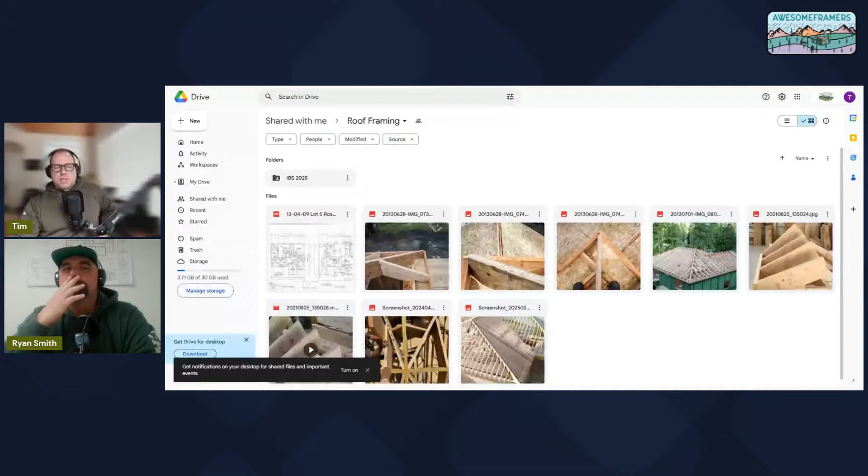But I guess my question for you, if we were to present this to somebody that has never done it, maybe a framer, but they haven't done a lot of hand cut, maybe they've just done trusses—where would you train somebody that came to work for you, that had some years as a framer, but mostly was on a truss roof?

Oh, I think we would go to the basics, and we would probably start with the plan, the blueprint, the roof plan, and the elevations, just to see how many pitches are involved, what fascias line up, what overhangs are the same projection, things like that, and then move into some of the stuff you've shared with using the calculator and how to actually determine the length, the hypotenuse of the triangle that essentially is the rafter, using the terms we use—run and rise, diagonal, things like that.

Okay, so I'm going to share. We dug up, let's see, window. This is the PDF program. Add to stage. So I'm just going to back this up real quick. We built this house back in 2013.

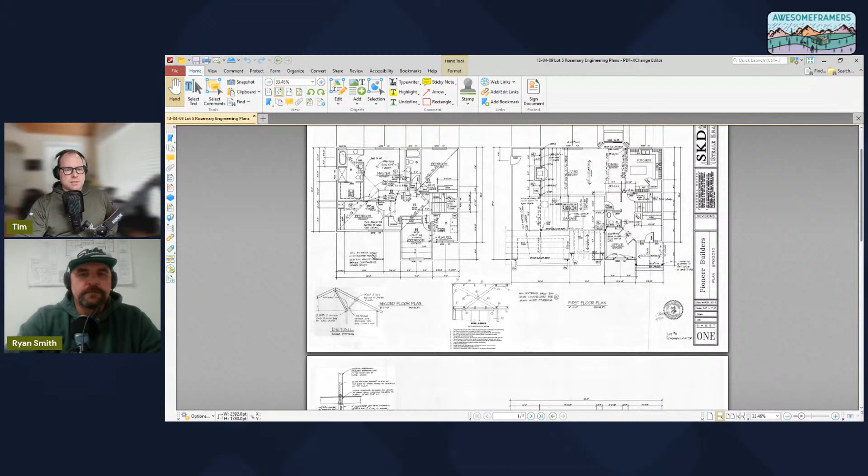And if I zoom out, it's extremely basic. For some reason, every time we get these scans or these plans scanned, they end up being just massive. Okay, so super straightforward—it's all a 612 roof, like the little front was a 412 over the front of the garage, just really basic.

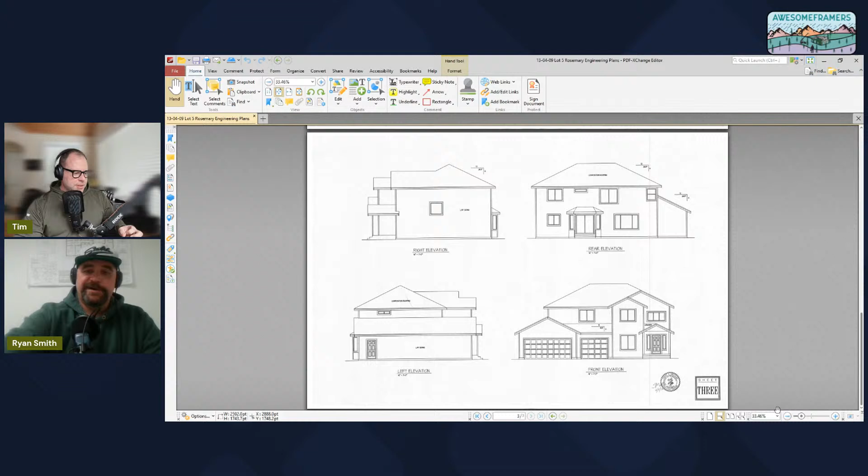And I think this is the last time I framed a hip roof. We did a little one that had a hip over the garage back in 2019, but this one here was the full hip roof. So when I wrote the article for JLC, this was the one that's in all the pictures. Yeah, that's very similar to the one we just did yesterday, minus the gables—we didn't have any gables.

No gables? No. So if I back up—Brian found the plans for me, and there's almost no detail. Yeah, so this is also like the one we just did. Okay, so that's good. So there's the roof basically on the left. Wow, that's wild, look at that. Just really nothing to it.

At least they called out your hips and valleys. The one I just did, they didn't give me any information. Yeah, no. Well, this one's got the engineer stamp, so Terry—yeah, so did ours.

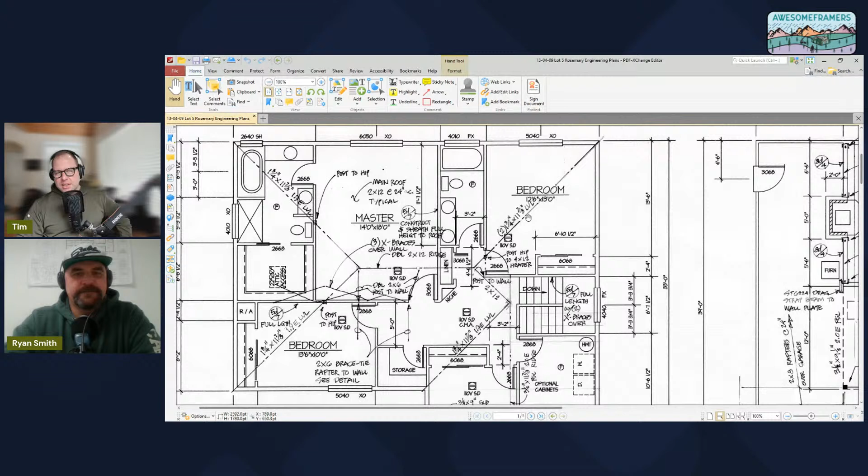Did he? Oh yeah. So one thing Terry always tried to do—if I zoom in, you notice that over this bedroom, there's nowhere to post. Right, but he's got a double hip there. So he's got a double. Yep, he called out 1 11 7/8. But of course, with 2x12 rafters, I had to order 14-inch deep to get full for the plumb cut.

Right, Joe says that's a nice little one. Yes it is, Joe. In fact, I remember when Kyle and I sheathed that—it was a custom, the guy's name was Ivan, really nice guy. We started early the day that we sheathed it, and it was just like ungodly hot, going to be upper 90s. For us, that's pretty hot. Yeah, that's hot here. So we started early, like 6:30, and Ivan shows up with a big carafe of hot coffee from Starbucks, and we're like, hey, thanks, man.

The sentiment's good, but we're just going to get on it and get this thing sheeted so we can go home. And then later, a couple weeks later, he's like, yeah, I don't know what I was thinking. Hot coffee on a hot day.

So if you had this set and you were going to teach somebody, we'd assume the audience might not ask a lot of questions. But we talked about how you can solve everything if you break it down to triangles.

So looking at this, what triangles would you point out to somebody looking at this for the first time? Well, I would start with the ridges first, and those are going to show us the triangles. So we have that one main ridge there.

Speaking on the left side of this plan, we notice where the two hip rafters emanate from. So that dimension out there of 29 feet becomes our main span. Then we would have to pay attention to what our ridge board is and if that's called out. In this case, it is. Looks like you have a double 2x12, so we know that's 3 inches.

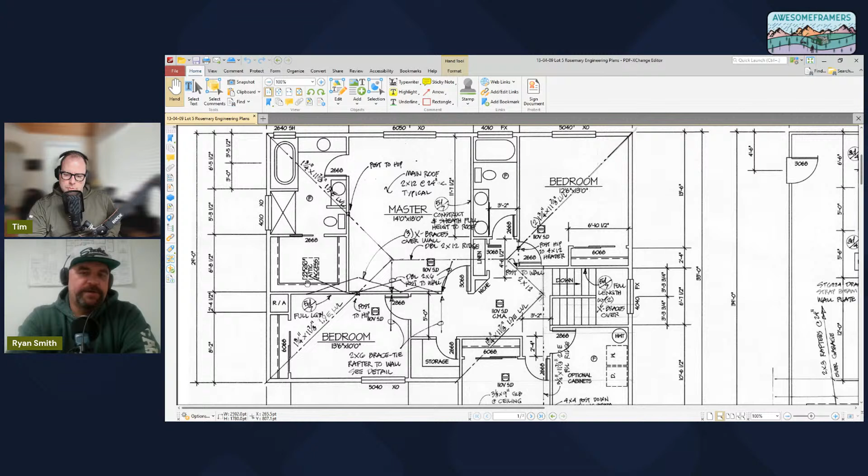So we would just start there very simply without thinking about the hips, jack rafters, or anything. I would want to show them how to solve for the common rafter and then how to determine the height, or the top of that ridge, from the top of our wall.

That's something I like to do. It's a nice home base. It keeps you grounded while you're working across more complicated roof structures. If you can always know where you're at in relation to the top of your wall, it helps as you get into more detailed things like broken hips and jacks and irregular hips and valleys.

So if I'm making a note, you would start with the ridge for the main span, and I would start with determining those commons, the major pitch. In our case, they're both the same because it's all a regular roof, which makes things a lot easier.

Everything's a 45 on this roof, so let me see if I can draw some lines. I'm not very good with this PDF-XChange Editor. I feel like, okay, I think I can draw a line. Let me draw a circle. You're looking for basically the 29 foot first.

Then you want to solve for common rafters and the ridge height, correct. So let's define, just in case people don't know, what is a common rafter?

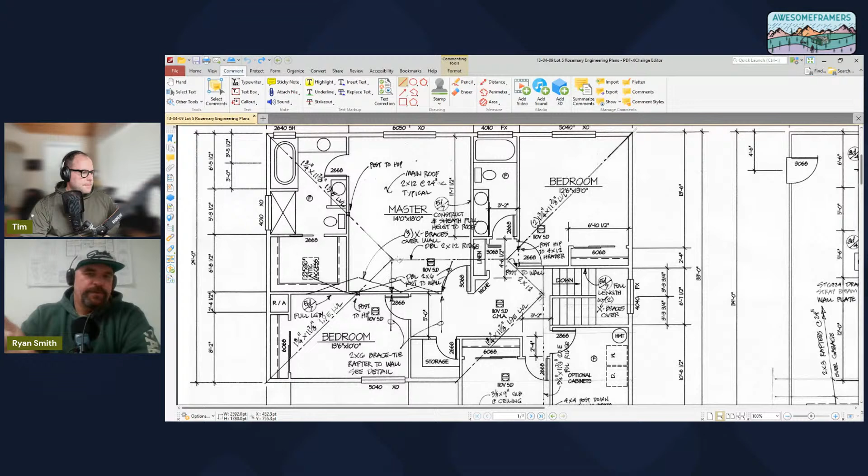Common rafter is the rafter that sets the ridge. In the regular roof framing world, the end king common and the common rafter are the same. If you are dealing with irregular pitches, then there's a major pitch and a minor pitch. The major pitch always sets the ridge. It's not necessarily the steeper pitch or the shallower pitch, because it can go either way.

But finding that highest point, as we're figuring as roof framers and carpenters, we're figuring the roof, but we're building it in our head. So in order to set the hips or figure the hips and jack rafters, we have to establish the height of that ridge, the length of that ridge, and the length of our rafters that are going to get that ridge actually set. So I kind of work it that way, as if I were building it.

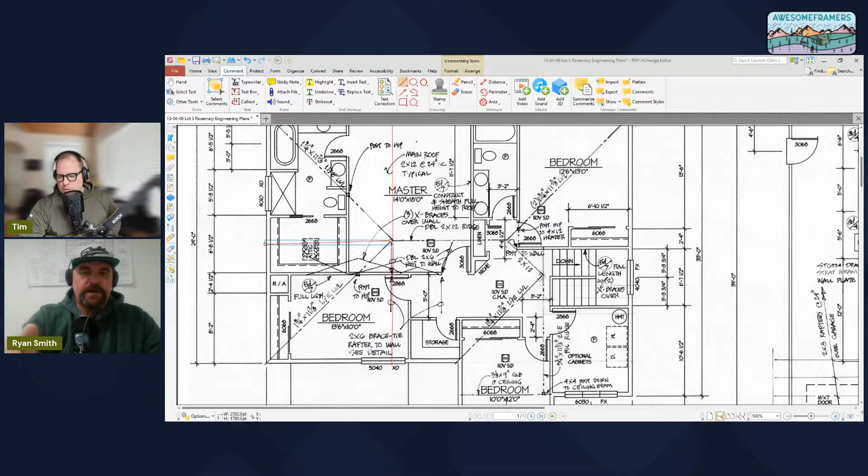Then once I figured out the common rafter, I would look at the length of the ridge and how to determine that. I would note my layout off of what I call a boss corner. That helps me find layout anywhere on the roof, north, south, east, west, doesn't matter, which would give me the layout on the ridge. Then I would start looking at my hips, my valleys. Once I get those calculated, then I would start looking at my jacks.

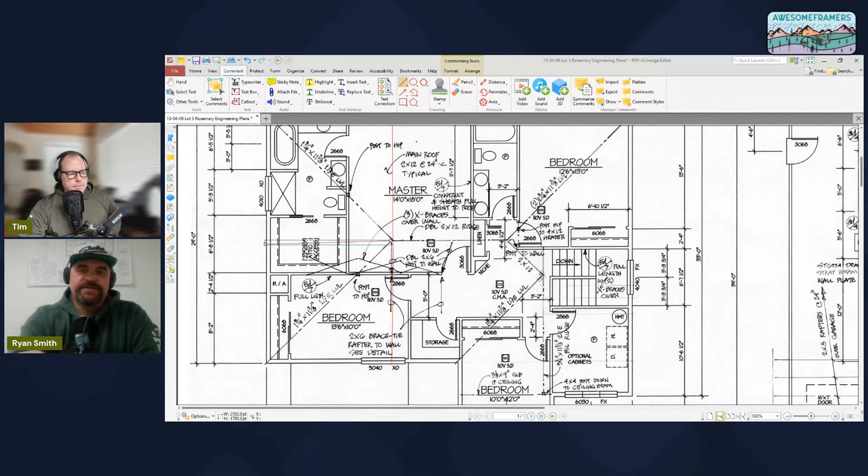In a case like this, with this layout, this one's pretty straightforward. So the rear elevation, or the rear of this roof, we have a double, or a 2-ply LVL hip, on one side and a single on the other. It's still the same length at the center line where we're going to actually make our marks and our cuts. Yes, one is twice the size of the other, but the line length is still identical.

So essentially, once we figure out one hip rafter, it's the same as 3, because we have 3 full hips here, and then we have a broken hip that's coming down, sharing, looks like probably a gable ridge coming back in. Let me share. Okay, present.

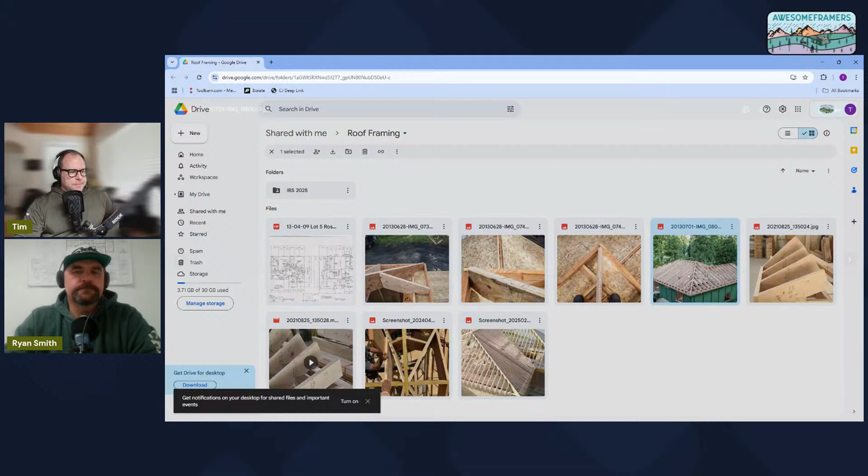So there's the double hip. Basically, I'm going to try to consolidate this, and then I want to make sure we get to some questions if anybody has any.

When we're looking at triangles, step one is to find the ridge and really define the triangle: the horizontal line, the run of the rafter, vertical to the ridge. Let's see if my cursor actually shows up here. I don't think it does. Does it? Oh, that's interesting.

That's a great picture. I like that picture. So that was the old days before the drone. That means I was up on the forks, and Kyle boomed me up.

Yeah, I like how you ran that ridge all the way into your king common. So we could diverge a little bit. You notice that we did the little bay roof down at the bottom first. I don't remember why, I have all the pictures for that. I think I probably thought I was going to write an article out of it. But running the ridge through, to me, just simplifies things. And then I think it looks like I doubled that king for that reason.

Can I zoom in on this? I know I keep trying to do that. I don't think I can. It doesn't let me. Oh, it's the mouse wheel. And then how do I pan? Just like that. Okay, oh yeah, there you go.

So we've got, let me back up. We've got all 2x12 rafters. It looks like we have the double 2x12 ridge, like the engineer called out, but we lowered it for the air gap and full bearing on the heels. This back hip we're looking at is doubled because it clear spans. The other hips we were able to post down off of walls. And then this ridge, because the designer always just kind of leaves that stuff up in the air, they just draw lines, and then we have to figure out how.

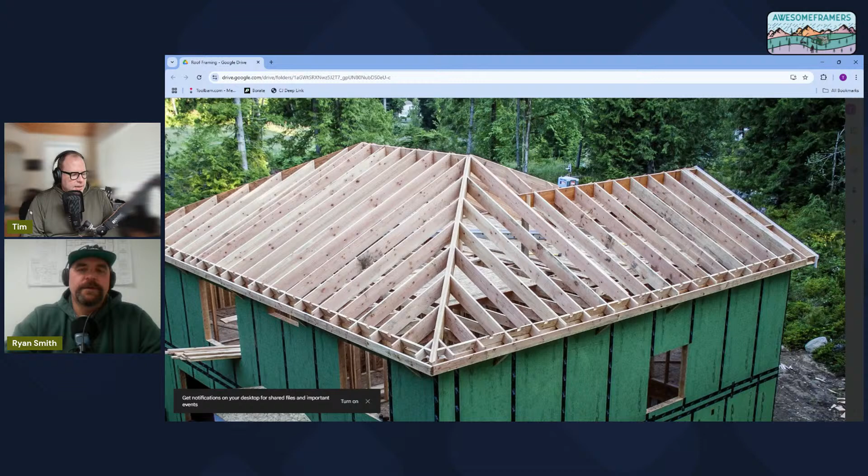Yeah, so if I can, let me see if I'm actually able to do this. In terms of triangles, this is a good run-through for IBS. We may want to actually be able to draw across, because I don't think I can draw on this. I thought I could a minute ago.

So we have the horizontal, like I think of a ceiling joist. We go vertical to the ridge, and then the diagonal is the rafter, the hypotenuse. Right, so there's a right triangle. In this case, the bottom right would be 90 degrees. The top is the 6/12 plumb cut, and on the plates, 6/12 level cut. Then, because it's a regular pitched roof, these hips are in plan view at 45 degrees.

So if you're solving for the hip, the line length of the rafter is easy. We just enter the effective run: span minus ridge divided by 2 for the run.

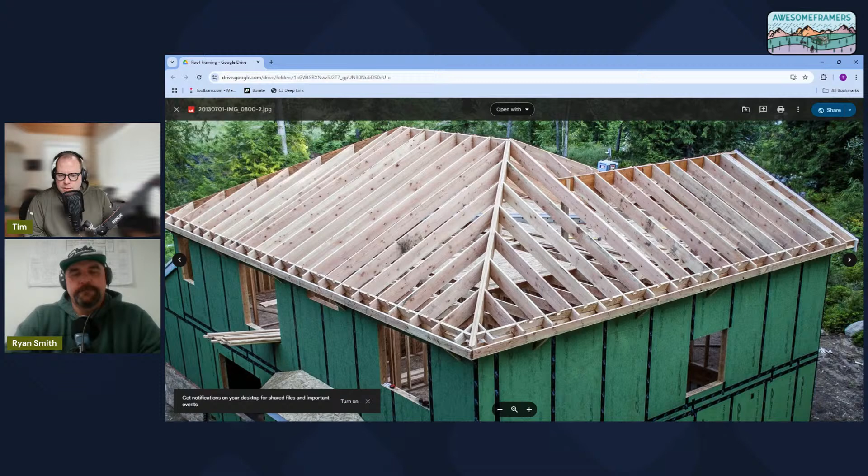I think we show that in a video here in just a minute. But then when you're breaking somebody new into hips, where do you start when it comes to calculating the hip?

So the run of your common rafter, you just plug that into your horizontal run of the triangle and your rise or your vertical plumb line. You're basically taking that triangle and laying it down flat. So if you took the run of your common rafter to the face of your ridge, and then the run of your end common rafter and king common to the end of the ridge, and they're both the same rafters, you can use those as two of your variables, your run and your rise, and then solve the diagonal, which will then tell you the run of your hip.

Okay, let me switch back to that other view. Yeah, the hip isn't the same pitch, right? It's a 17-inch run. So that's where roof framing gets sticky. It depends on how much you do know, like where do you actually start to explain, based on your level of understanding.

Yeah, that's a good view there because you can see. Did you just draw those two lines? The red ones? Yeah, I kind of. Very poorly. There's a run and a rise, and we're solving for that corner.

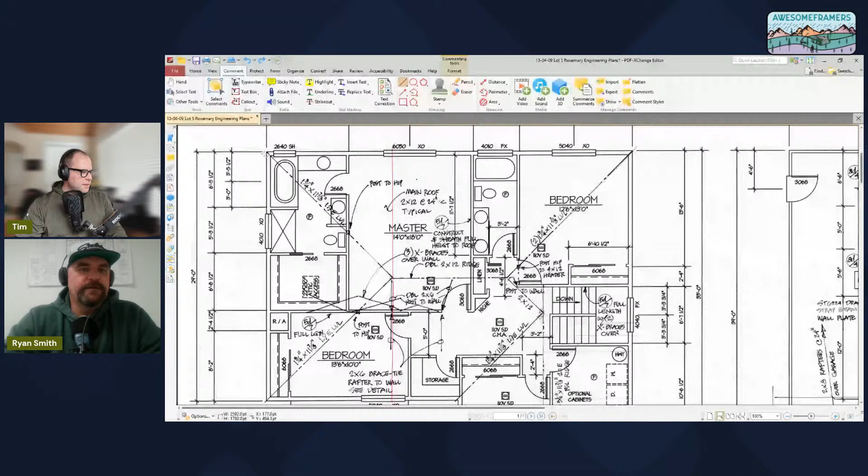I'm trying to make these lines thicker, and I just don't know with this thing. There should be, let me see if I can thicken this up a little bit. I'll try to make it obvious. I appreciate everybody's patience. We've never done this before. We don't know what tools we're using. We have no idea. No idea.

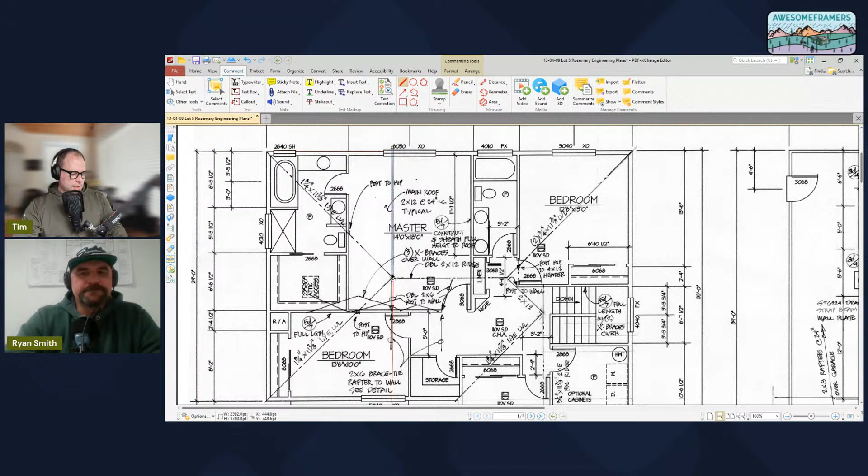Okay, we can crank this way up. There we go. Okay, so we have the run. Let's just say, I'm going to delete that if I can. I'm just going to draw a new line. So we've got the ridge here at the top. I think I keep clicking on that. We're just going to make this kind of ugly, but it's going to work. So there's the horizontal, the run of the common rafter.

And because it's an equal pitched roof, then that distance has to be the same as this distance. Correct. Yes. And logically, then it would be the same as this distance. Yes. So in plan view, now we have a right triangle where, since these are the same length legs in a right triangle, then this has to be a 45-degree angle. Correct, in plan view. Right.

Okay. And then we would need to solve. So using the run, which is the same as you just stated, if you're using the Construction Master calculator, or even if you aren't, and you're just using the trig tables in whatever scientific calculator, one is run, one is rise, or one is A and one is B.

So then when we solve for that, the diagonal becomes the horizontal line under that hip. It has nothing to do with the length, because we're not taking into consideration the slope at this point. We're always starting with the run. That's the first thing we want to know. That's the most important thing, because that sets all these points coming across the roof. Knowing the run of that common rafter, we know the length of this house, corner to corner. We can just take that number, subtract that run twice, and that'll tell us the length of our ridge.

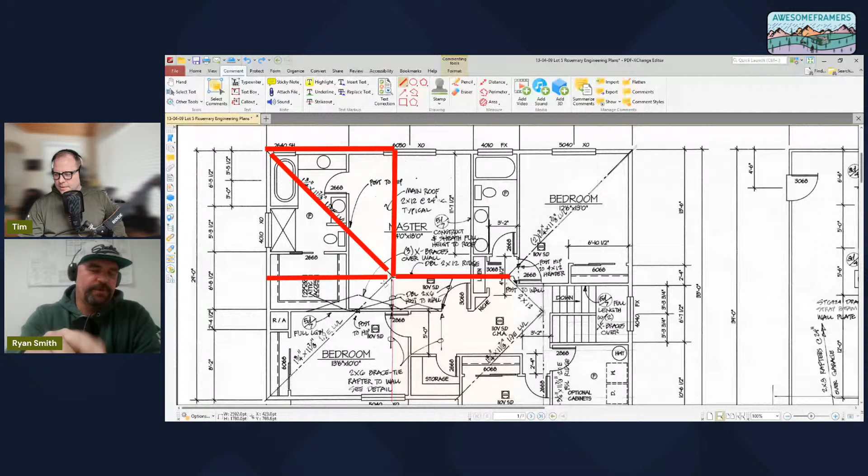I like it though because I'm not completely trusting the technology in here. I know the tables are all correct and everything's perfect, but I like to see the solution come out on both ends - check my shortest jack rafter, figure my longest, work myself down and back up to make sure everything's good before I write it down and go out in the shop and cut it.

So I do want to learn more about that, I just haven't spent the time to. Yeah, I watch their videos on Instagram, it's pretty interesting. Yeah, I haven't.

Let me bring back that other window. There we go.

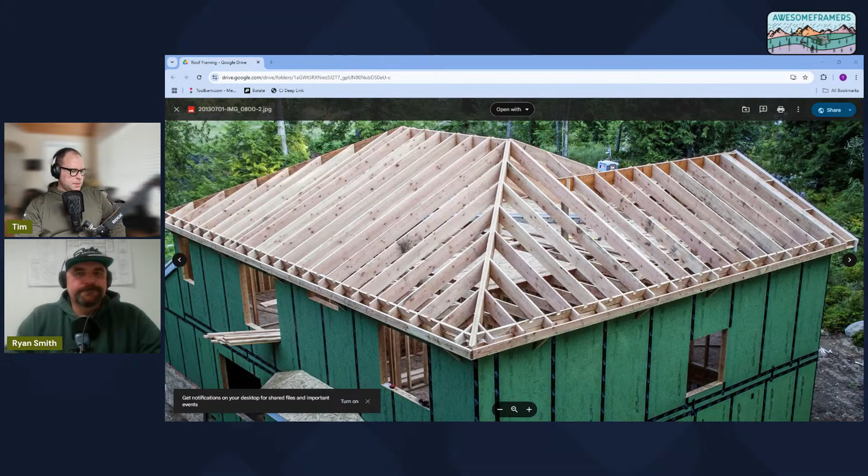Okay, so what we were just - man, I really wish I could draw on that. I wonder if I could open this in something else. Let me try something real quick, because I think this might help.

If I open this file, I might be able to open it directly in PDF-XChange Editor. Maybe not. Well, you know what, I'm going to open Photoshop and do it that way.

One moment. I'm going to share the same picture of the hip roof with the double hip and the double king commons, and then we can draw on it. I should have had this all ready to go. Oh, no worries, it's amazing the skills we have to learn now. Let me just start a new layer. Yeah, it's always changing too, new materials and new techniques.

Okay, Photoshop, here we go. I should have done this to begin with. Add to stage, okay so there we are. Now we can zoom in. Got to click into this.

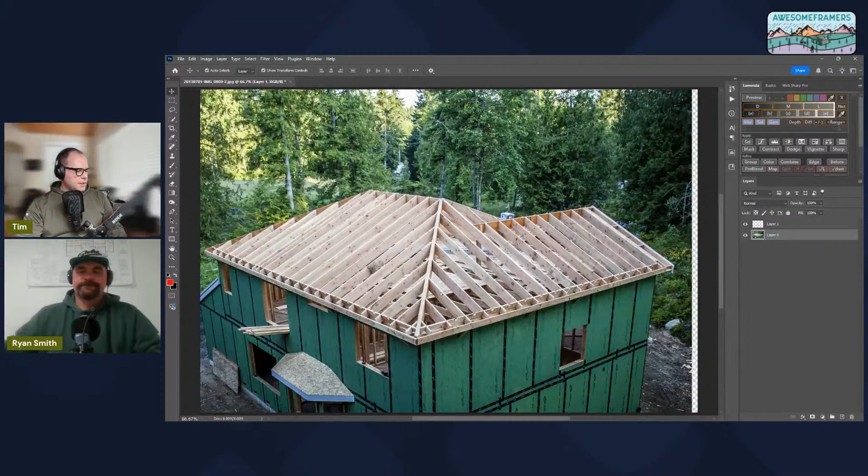Okay, so I'm going to zoom in and let's just draw some of the triangles that we know we have. So what we were just talking about, I'm going to go B for brush. We'll just pick red.

That is a great picture showing a regular hip. I like it. Yeah, I don't know what it is here in the Northwest, seems like we do mostly. Why won't it just give me B? I don't know why all of ours have to be irregular.

It's such a pain. Oh, I see, get rid of that. There we go, there we go. Let me shrink that just a little bit. Okay.

Cool, so I'm going to try to very crudely draw some triangles. This is going to be pretty bad. So we have vertical, and let's just go this way. So there's one triangle, roughly, right? So there's the common, perfect. Yeah, and that would loosely match. I like this. Look at that, perfect.

Dialed, okay so there we go. This is why I don't draw. But it's essentially, if those are right triangles, they're identical, they're exactly the same. Let's just say there's no thickness for anything. Right, so 6-12, they have the same run, the same rise, the same diagonal.

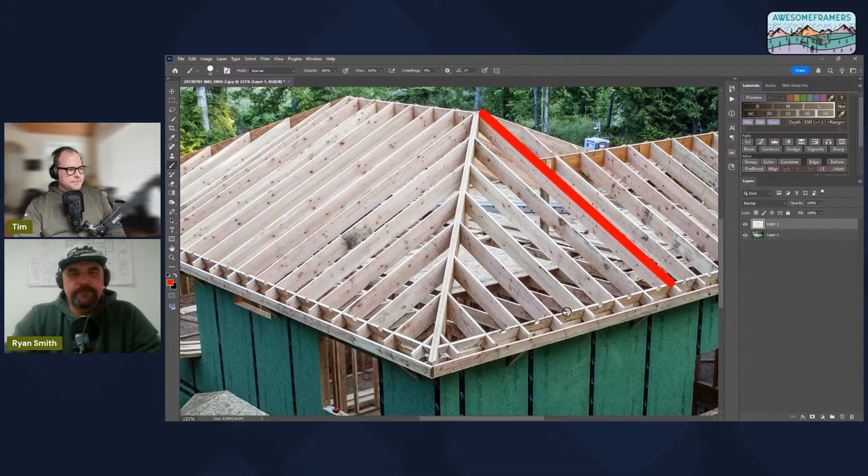So the run, let me try to redraw that real quick so that it's a little bit more normal. So we've got our king common, this guy. And our king common is, make sure I'm on the right one, this guy. Right, so those are going to be the same exact length, and their runs or horizontal distance, which would shoot somewhere back here by that post, those would all be the same.

And because this guy and this guy are the same, they actually follow these as well. Exactly, so the runs are all the same, and we're just sliding those triangles back and forth. And then to get the hip, we would just basically rise, run now on the horizontal. Yep, and there's our 45 underneath the hip. Right, roughly, we can make that a little cleaner.

Yeah, it would be in there somewhere more like that. Then from that, we have all of our vertical numbers, and so now we have a whole bunch of triangles that are mostly the same. And the last one that we would solve for would be the hip, which comes all the way out to here. So we're kind of just making a pyramid. Yeah, more or less, roof. That's all roofs are, they're just triangles.

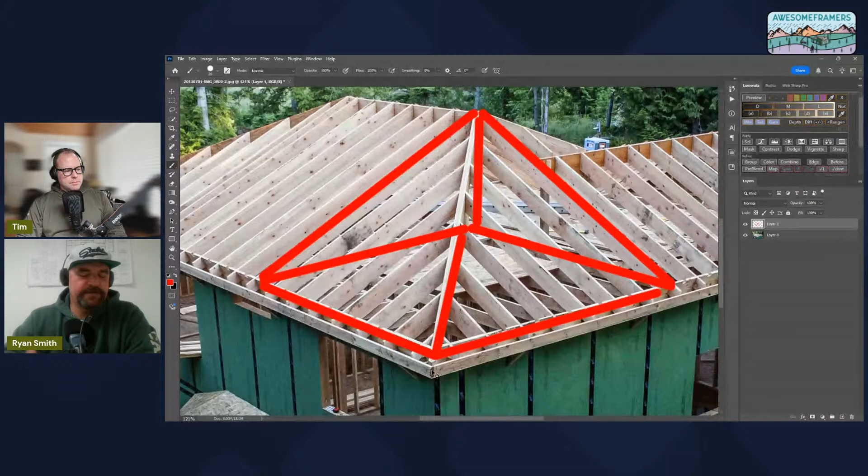And I'm simple, so I take it one ridge at a time. Some of the plans and roofs I've cut, when you first open the plans it's very overwhelming. You're like, wow, there's 47 hips and valleys and 22 ridges. So if you just take one at a time and look at it the way we're looking at this photo you took, it gets a lot easier. You just take little bites at it.

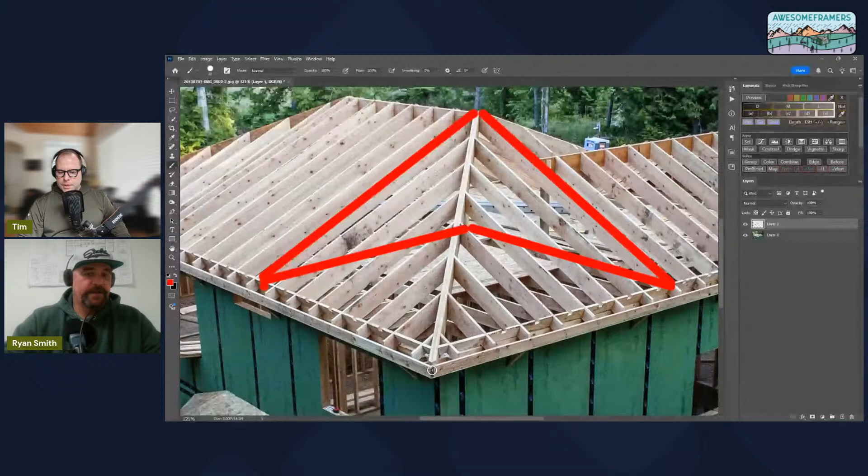Yeah, a little bit at a time, which leads me to like the overhangs, which is why I like to start there. Because if you take care of all that business that happens out there outside the plate line with your cornice work, and you know that's set and everything is good with all the pitches, you have your plating figured out, your height above plates, then you can really just focus on the triangles because you've already worked that out. And I like to do that graphically.

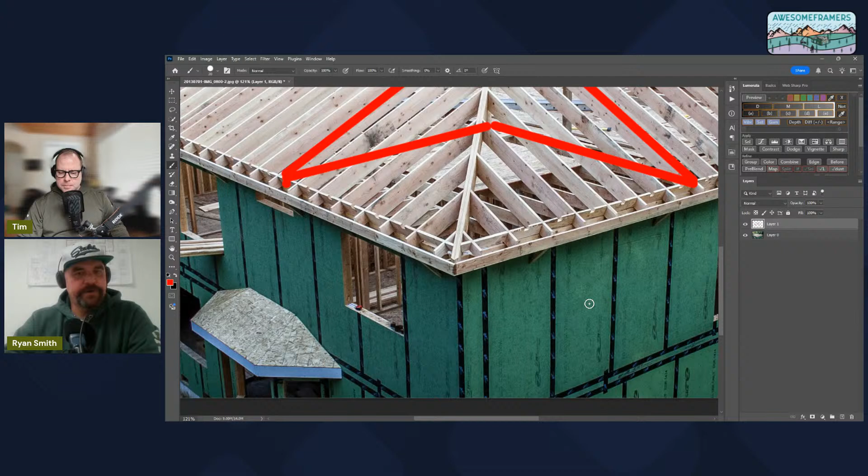I'll actually draw it out. You've shared that too, Tim—I've seen you do that on your page, and a lot of guys on Instagram do it. You can draw it out, figure out your overhangs, make everything line up nice, and then forget all about it and just work from the plate lines in, like we're showing here. It works good for me.

Well, yeah, that's the thing—it's like the more teachers there are, the better.

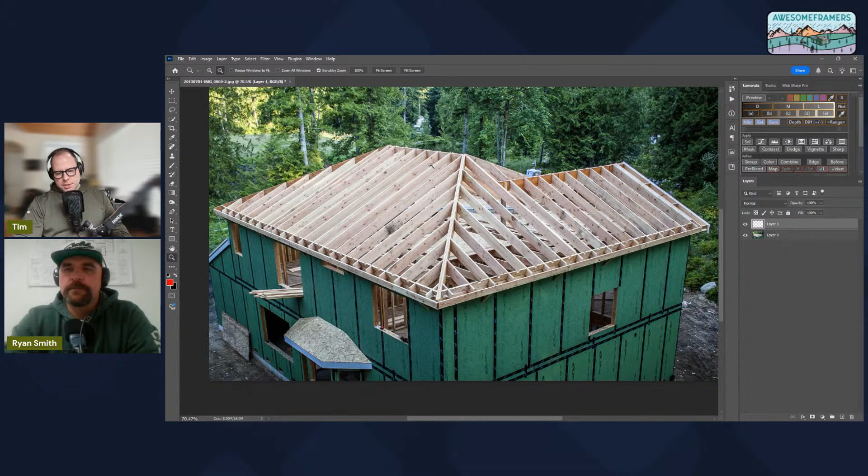I'll briefly explain how I went about framing the roof. I did exactly like you said—let me get rid of these lines. I've always set my ridges, that's just the way I was taught. With a double ridge, it's usually too heavy for us to hold in the air, so for this upper ridge we calculated the height and set it on posts, then set these rafters to it.

So step one was to set the ridge. Step two was to set about four sets of rafters just to lock in the ends, and do the same thing on the other side. But we ran this wild.

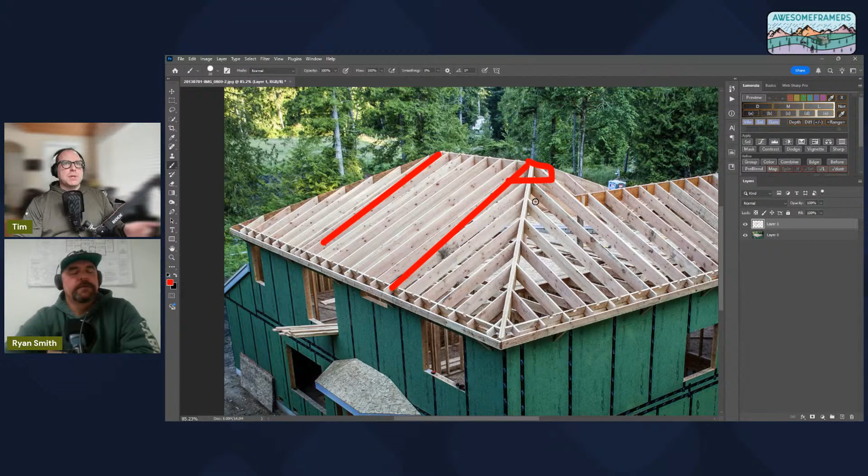The end of your ridge—actually, let me back that up, because I think Kyle and I took pictures of that. Let me back up: this rafter went in and located this end, but we ran the other end wild.

We put the two rafters at the next layout mark back, then held the other king common right where we wanted it and just marked it to the plumb cut, and cut it off in the air. Yeah, I used to do the same thing.

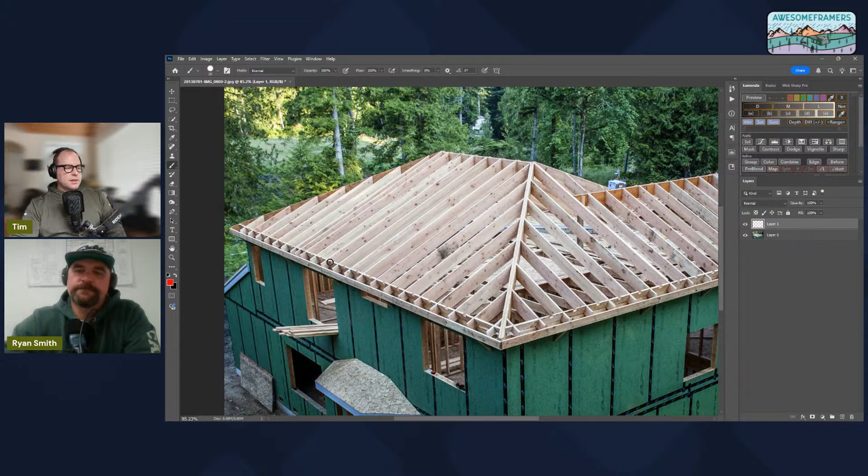That's just it—and like Joe mentioned a bit earlier, for this ridge we just take one of these rafters, slam it up against the double king, and mark it because you're so close.

Yeah, it is contagious, Joe. That's funny.

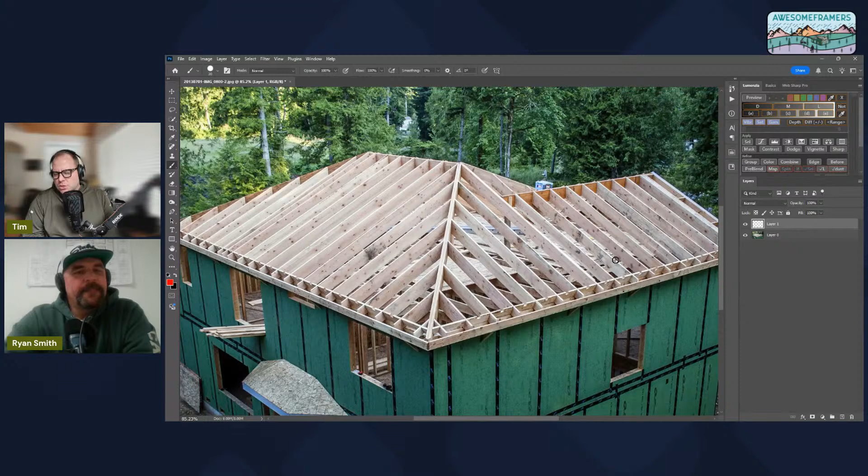So I'm thinking as we go through this, Ryan, I'm trying to simplify this for IBS, and I'm going to make some notes—greetings, Green Bay, Wisconsin. I think we need to get really basic and describe, maybe using this picture, and I'll try to label it.

In this picture, this is the ridge. This is a common rafter, and this is a common rafter—let me clear those so it's not cluttered. This is a hip rafter, and that is a hip rafter. I'd love to get people more involved.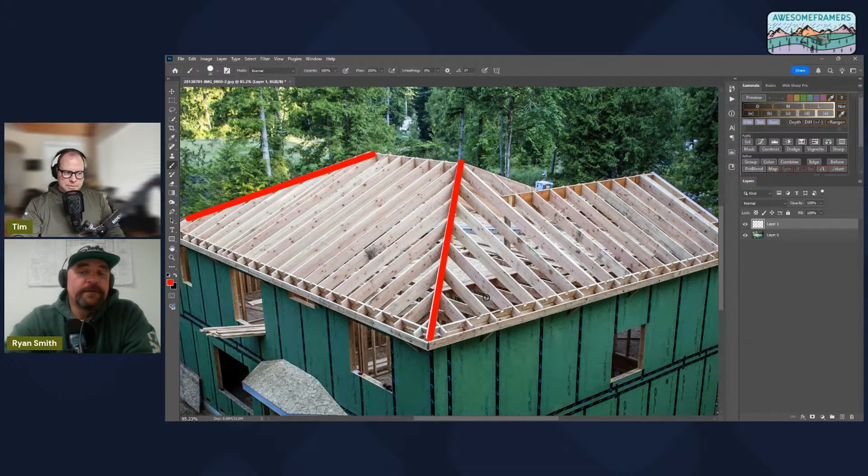There's one more hip rafter in the picture—where is it? Right, yeah, we only have a half an hour. That's the issue, and we're already past that. We could talk about this for the entire weekend and barely scratch the surface.

So I'm thinking I do like this—calling out the parts of the roof and explaining what each one is. I don't know if we'll have enough time to really explain how to actually do it, that's going to be too time consuming. You could spend a half an hour just on a common rafter, really.

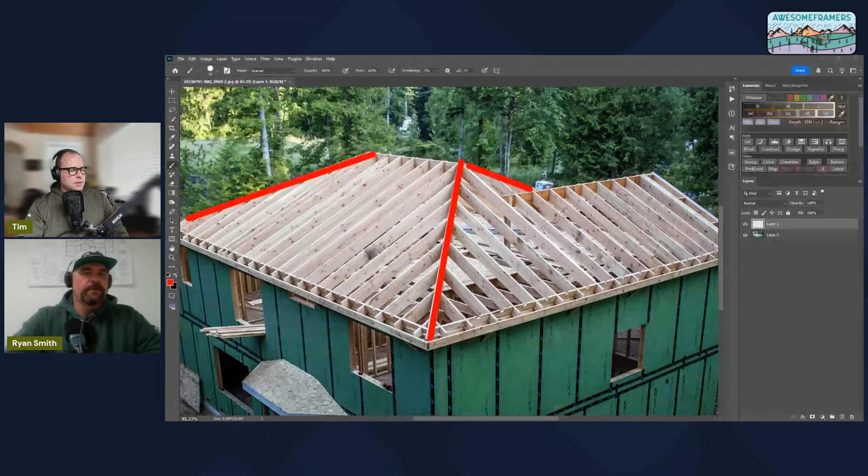So maybe let me see if I can do this quickly, because Photoshop seems like a good way to do this. Let me put this over and we'll add another picture. I'll zoom out so there's just a close up of the other side.

Now here's something I do that's not necessarily right, but I don't think it's wrong either: I didn't calculate anything from the plates. I calculated it from the outside of the wall sheathing, so I could butt my rafters right into the soffit framing, because the soffits were all pre-framed.

Yeah, and that sometimes trips people up. But one of the things I think is important for people to know—I do the same thing—is that the overhang is a separate calculation.

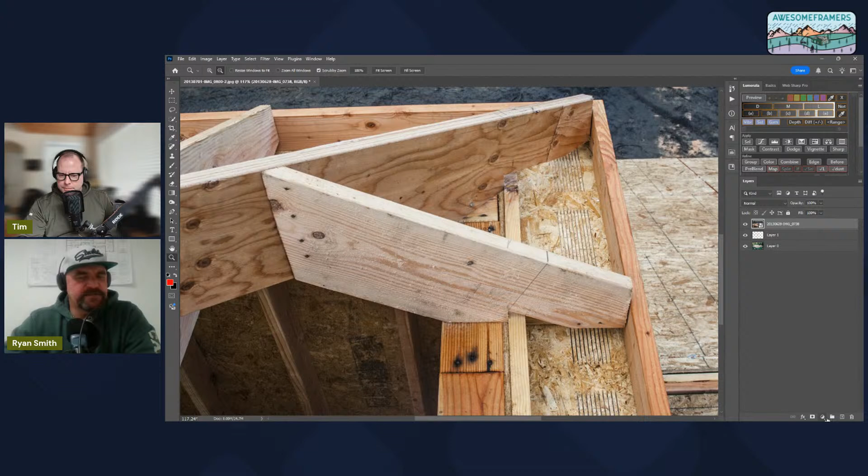Is that what you're referring to? Well, specifically—let me create a new layer here—right down here: basically I would have used 29 feet 1 inch to start my calculations, because I'm adding a half inch of sheathing to the outside of each side.

Oh yeah, you're right, okay. So I was assuming 29 feet was the face of the wall sheathing. Oh, okay—yeah, however the plan called it out.

Typically our numbers include what they'll call a 6-inch wall, so they're saying a 2x6 with 7/16 or 1/2 inch sheathing on it. When I took AutoCAD back in high school, around 94, 95, that was the big debate in class, and of course none of us knew, we were just students. Your walls are 3.5, 5.5, but with sheathing, which was just coming in with double wall construction, it was like, do we add that? Of course, you do whatever you want. For us, because we pre-framed the soffits, we had that 2x4 nailed to the plates. Now we could just butt our jacks, nail them at the ridge, and slide them over. Yeah, that's awesome, it's like having an extra guy down there.

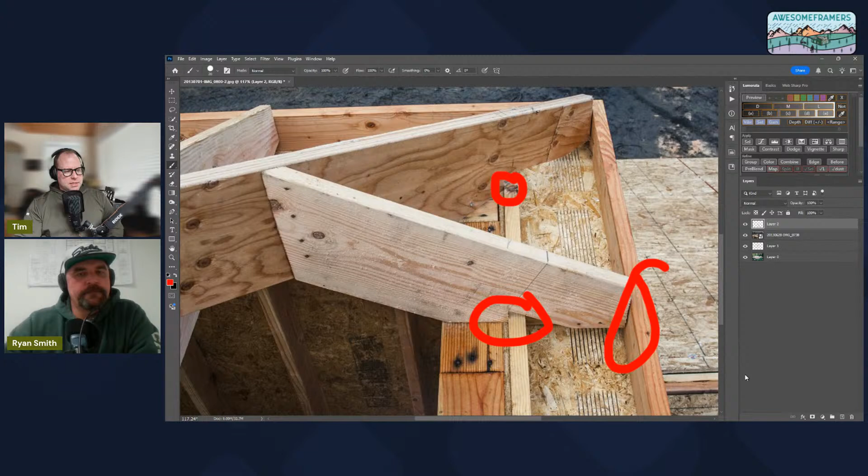I don't think we're going to get into this in the class, but essentially what I circled here, that line of sheathing, then when we cut our hip, it has to hit exactly that spot too. People always like to nitpick us on that, because I always cut everything a quarter short for the soffits. I want to make sure it fits. That's my biggest secret I don't tell anyone, because they ask how we're cutting these roofs and everything just fits. Well, we cut all the ceiling joists a quarter inch short so we can move, because we frame on top of the ceiling.

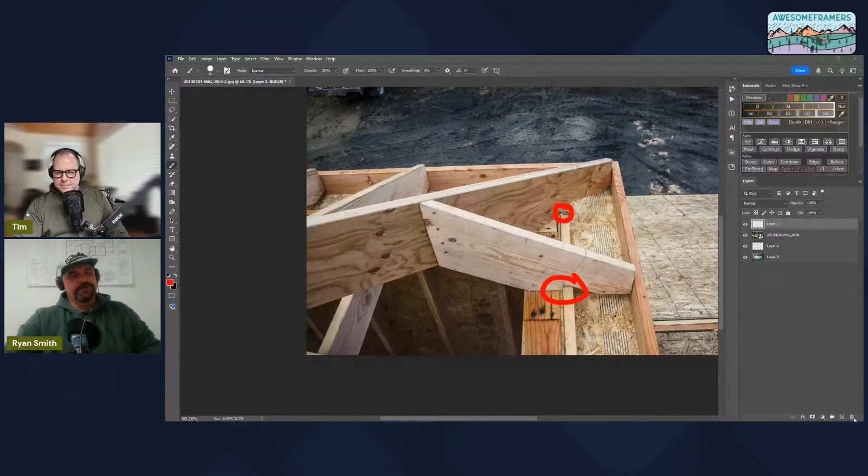They call it an energy heel here. So we add the 1.5 inch rim board, whatever the ceiling is, and that gives us a 1/2 inch of play to move everything around and get it perfect again when we go roll the ceiling joist. Everyone's like, oh, everything grows, if you cut it 16 feet it's not 16 feet. Okay, whatever, but we control everything as carpenters. If you do everything with a purpose, then you can get good results.

That's right, that's a great picture. I love that.

So those are those original Keens that were just clown shoes. Yeah, this was like the first iteration, and it was like, hey, they're comfortable, but by putting the safety toe on the outside, as opposed to most manufacturers who shave the last of the boot back. So you can kind of see how we framed it. Got a double ridge down low too, it looks like. Yeah, that was just over a section of the garage. Yeah, that was a fun house.

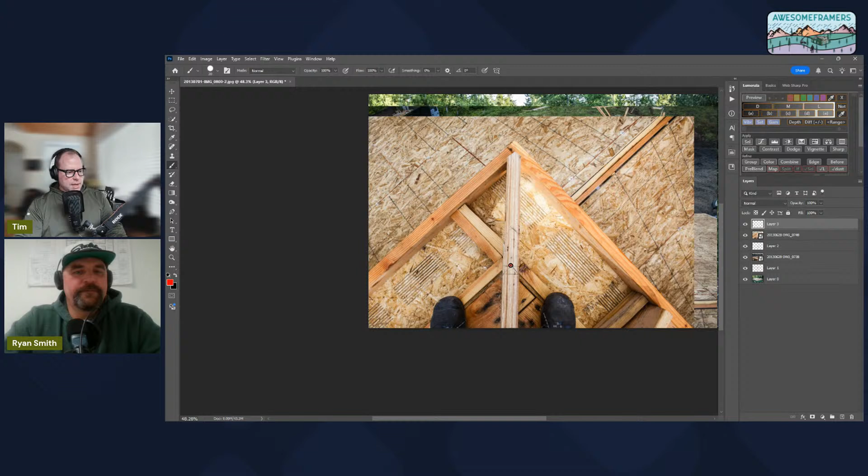That's a perfect picture to explain plan view. That's exactly what I was thinking for the presentation, plan view. So horizontally, like here it represents the outside of the wall plates. So our number actually is right to there, and then got to measure half the thickness of the ridge back. But the same exact thing we're talking about for the kings is the same as this, there's just another triangle.

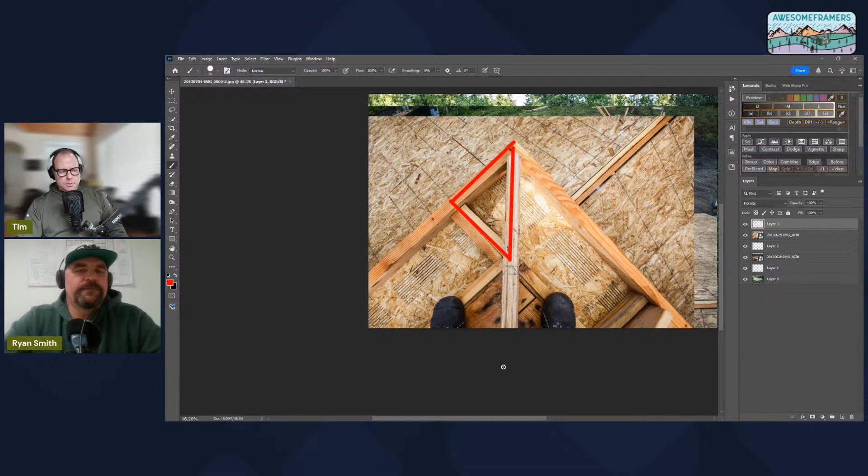And then if we rotated it on the side like we had it, we can add a vertical number to that, get another triangle, and that gives us our wall sheathing, or our roof sheathing. So then to figure out roof sheathing, we can just come that number and connect the dots, and of course this would be a right triangle. Right triangle math will get you through 99% of any roof framing scenario that I've found.

Okay, let me erase those. So it's really just starting with the triangles that you can solve for first, or the ones you choose to first, and then working from there. And then there would be roughly the horizontal, and I'll just go like this. There's another triangle for the hip. Try to make that 90.

Piece of plywood and a couple piano hinges. Yeah, because that's essentially all a plan view drawing is, right? There's no dimension to it.

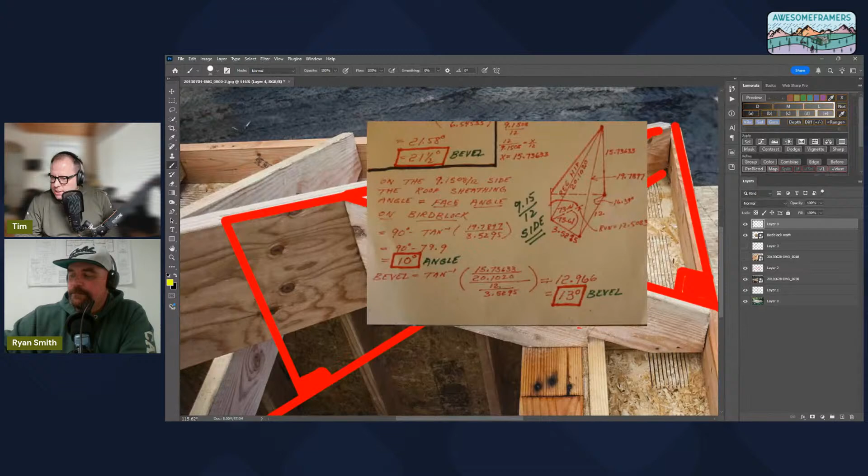Okay, I don't think that's a question, he's just going through the math. San Juan Island, nice, Friday Harbor. Used to be a guy up there that posted a lot on JLC about 20 years ago. I don't think either of us can... Hey Paul Garrick, I don't know that either of us can recommend a good architect or engineer because we don't know where he's from. Right, yeah.

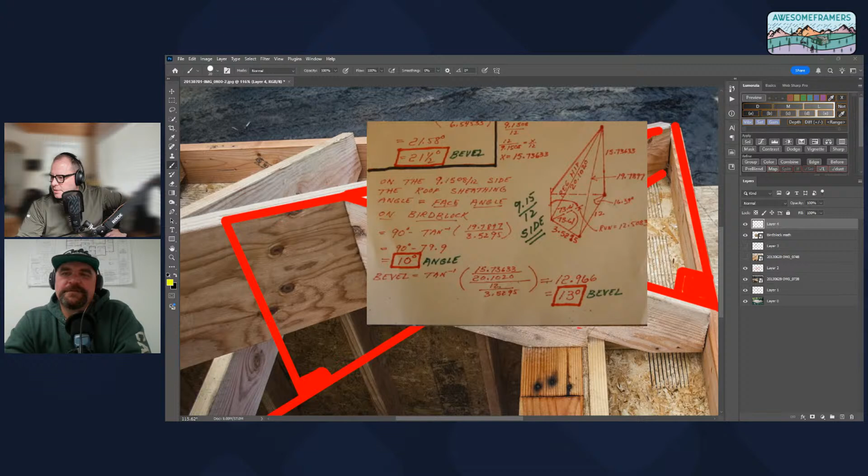Okay, here's a good question Kyle's got. Can I pin this? Is the height above... hey, look at that, always the same for the hip. Yeah, that is a good question. That's a very good question. Answer it, Ryan, answer it, you have 5 seconds.

Yes and no. Depends on if you're backing your shoulders off your hip. Otherwise, there's a deduction. But it is very close to the same height above plate. How's that for an answer?

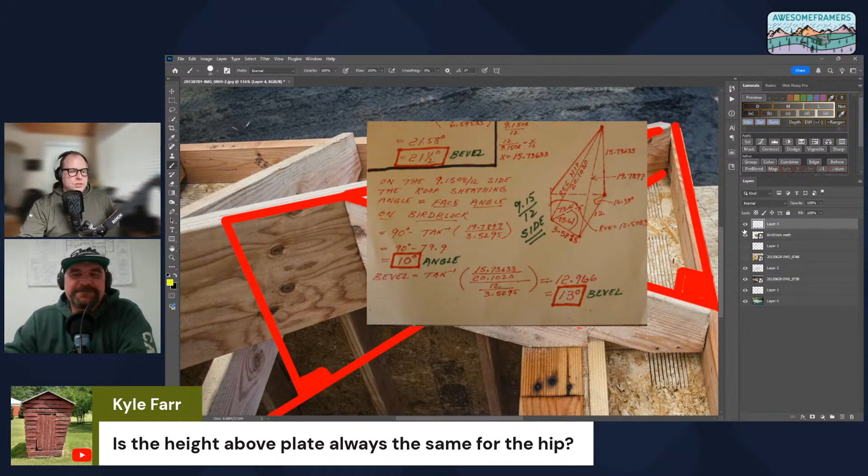It's true. So if that's true, let me turn off these layers. Height above plate depends on where you're going to put your bird. Are you going to cut your bird's mouth square and pull it in tight to the outside corner? Are you going to bevel your bird's mouth? Are you going to mark half the thickness, like you said earlier? Because at that point, that top view you had looking down shows that.

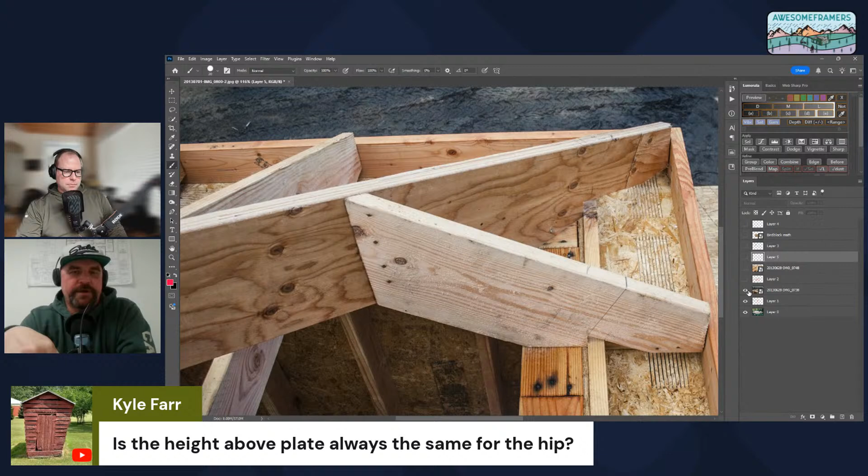That was a perfect view. When we were looking straight down at the hip, you had the actual corner of the building drawn. And at that point, where was it? Yeah, right there. So the height above the plate is exactly the same where you have those two lines, perpendicular lines coming back. Yeah, you can see it.

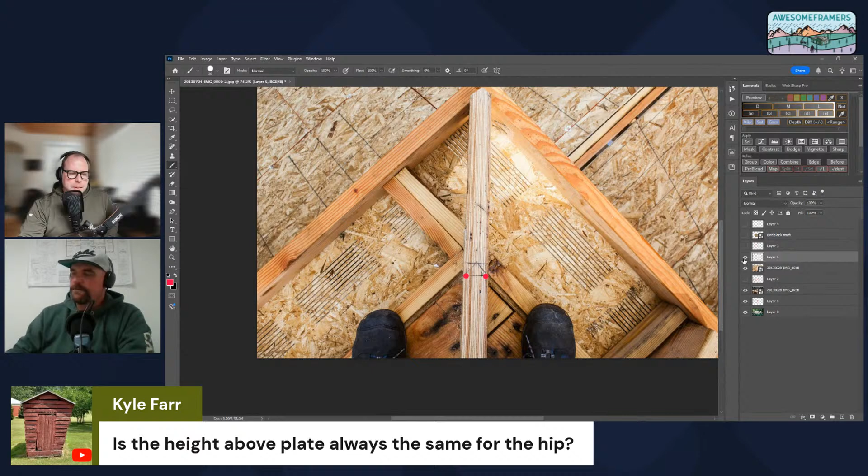That's a great shot. You would have to lay out your height above plate there, and right here. Yeah, exactly. Which roughly lines up with that. So that would be my answer, going back to - got too many drawings - is the birds, or the height above plate. Let me turn this. I just created a new layer just for this.

Okay, so height above plate, for those that don't know, is the vertical distance really at the outside of the wall. In this case, for me, it was wall sheathing, but most of the time you can actually see the mark right there on the top of that rafter.

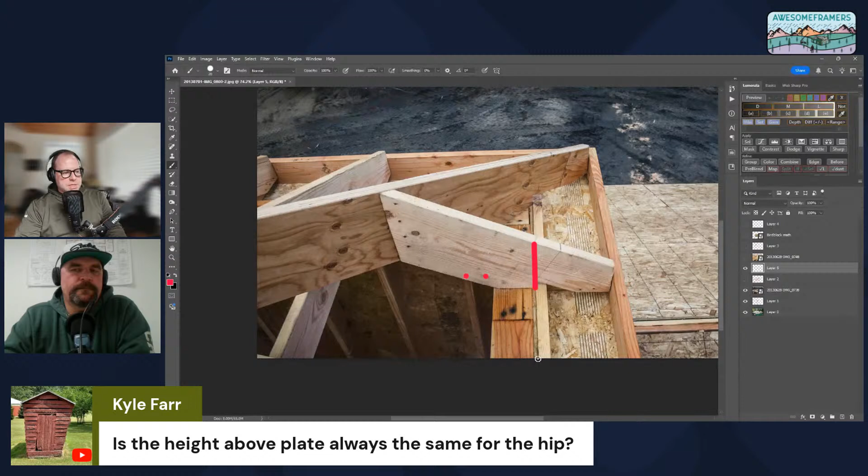So then the question is, I would say yes, it is always the same on the hip. Only with regular roofs, though. Yeah, because irregulars, with equal overhangs, it won't sit on the corner. So there's a whole other conversation there.

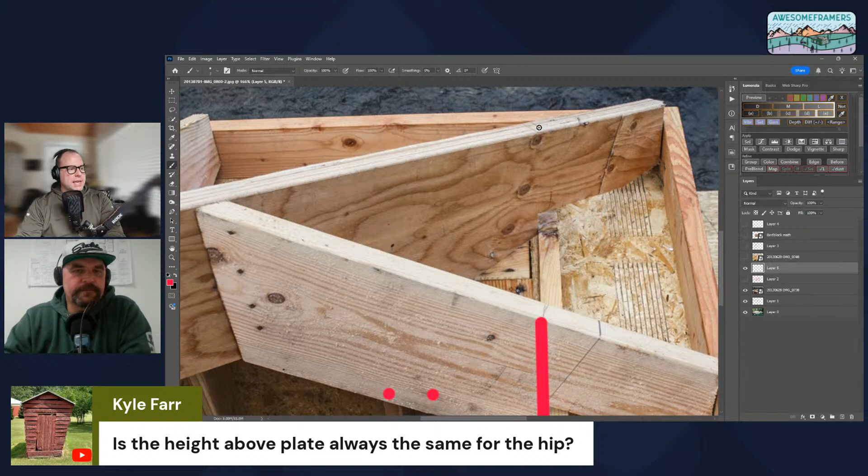So that's why you can kind of see if I zoom in. That's a good illustration. Boy, I wish it was higher resolution. I probably have these files somewhere, but you can see. So the hip rafter length is the outside corner. It's over here, right? And then I always draw my plumb line straight down, which would be probably somewhere. It looks like I have a mark there, there, and then we go parallel back half the thickness of the hip, and that gets us right there.

Yep. And then I just square cut. I don't use saws with bevels to go both ways. Yeah, I don't either. Stop it. Yeah. And then that connects the dot to right there and right there.

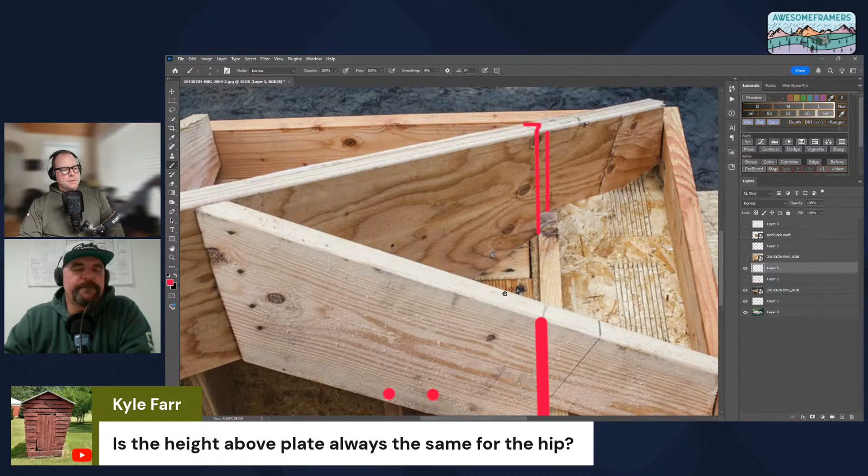Yep. Okay, excellent. Turns out we actually had a couple of good pictures that showed it. That's a great picture. Yeah, I'll have to dig up one that - well, one of these days we'll go live again. Yeah, try to get people. I mean, we don't know what we're doing here.

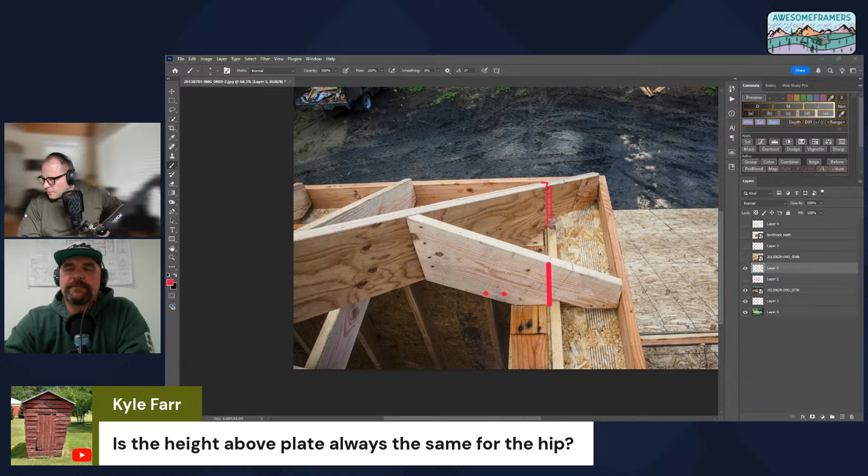Okay, how about Kaelen's comment there at 140? Let's see, I can pin that. You can help us out with this, Ryan. We should see how fast Ryan can calculate this. Which one was wrong, Kaelen? Let's see. He ended up guessing and checking, wound up with a 34.39-degree plumb cut.

Not fit, about 141 inch, inch and 3/4 by 16 rafter. It's a long rafter. That must be a very long rafter. Yeah, I mean, what's the pitch? Yeah, what's the pitch? And I'll see if it comes up in the comment down below.

Yeah, while you're at it, Kaelen, can you let us know what's your pitch? Did we miss it? And I hope I'm saying your name right.

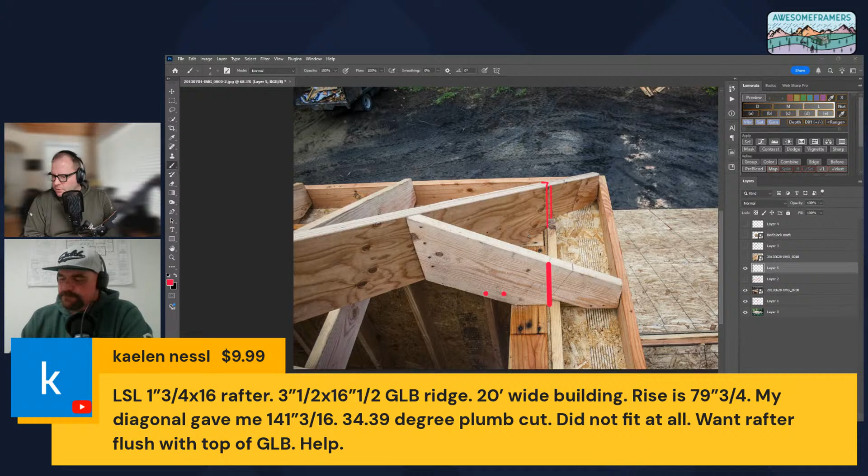Yeah, I wonder why. I don't know. Yeah, 20 foot minus 3.5 inch ridge. Are you still on here, Kaelen? Yeah, 141 and 3/16. That, or we're missing something.

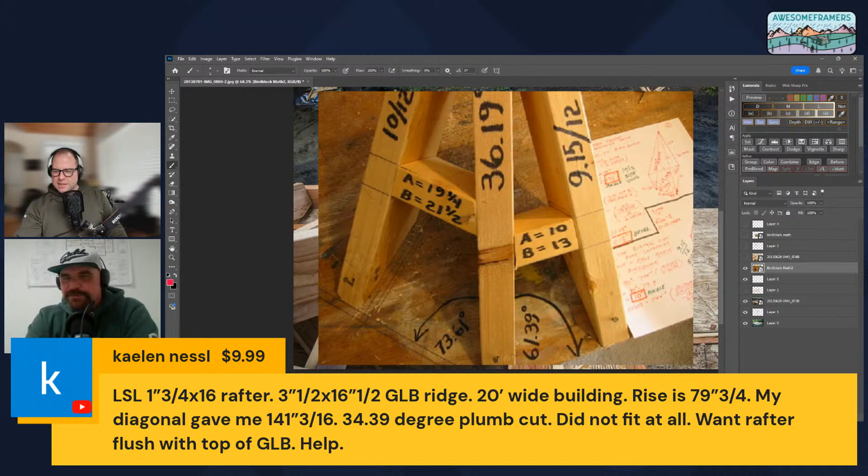So here, I'm just going to throw this on here while I think, and it shows up while Kaelen jumps on. I've done that too, Joe, more times than I could count. That's funny, yeah, that's a great picture.

Yeah, so that was his bird block math, you could see it in the background. Took a picture. Awesome. We had to do that all with a digital SLR back in the day because none of us had a cell phone.

Okay Paul, I got your email, I'll respond. Short answer is I don't know, but we're going to be starting work with an engineer down in Packwood, I believe. This was when we had a house plan we kept doing with a half octagon, like a breakfast nook that jutted off the back, and the master bedroom did too. It would take all day because we'd sit there and figure it out.

So that would be this line here. Did you see Kaelen's new comment? No, okay. That's what he's doing.

Exactly, Crimson Acres. So he's taking the ridge off, the entire ridge from the center line of the span, instead of just half of it. That's why he's just a little short. So that should answer that for you.

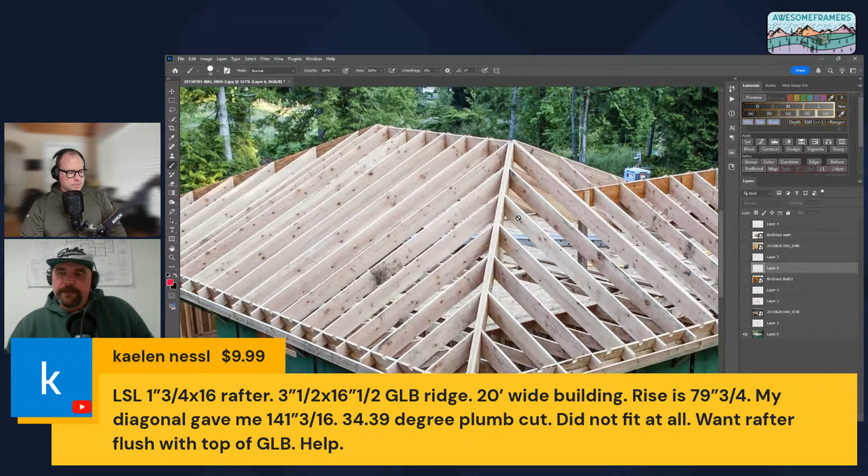So 10 feet minus 3.5 isn't correct. You'd want 10 feet minus half of 3.5, which would be your 1 3/4 inches. And then you would want to use that as your run, which would be 118 1/4. Then you should be good to go. But at that point, if you already cut a bunch, just pack the ridge out a little bit so you don't have to waste all the rafters.

See, that was worth the price of admission, Kaelen.

I wish, Ryan. So the guy that taught me to frame, he was pretty much self-taught on the roof. And so we would just draw 45s over the top of a hip rafter. And it's like, well, it's not technically 45 degrees because once the saw goes through it -- otherwise your roof sheathing would be 45. So there were lots of little things. They all look fine. We figured it out.

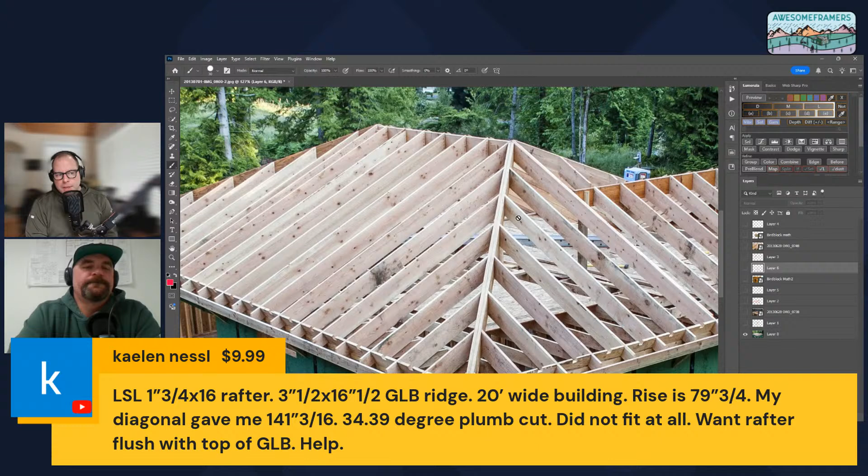Yeah, but what I never got a chance to work with is somebody who just stacks roofs, because I'm convinced that the order that you stack things -- like the math can be right on the money, the framing can be right on the money, the cutting can be right on the money, but putting them together in the wrong order can make things not fit.

100% true. Okay, good. Yep, that's 100% true. Feel better.

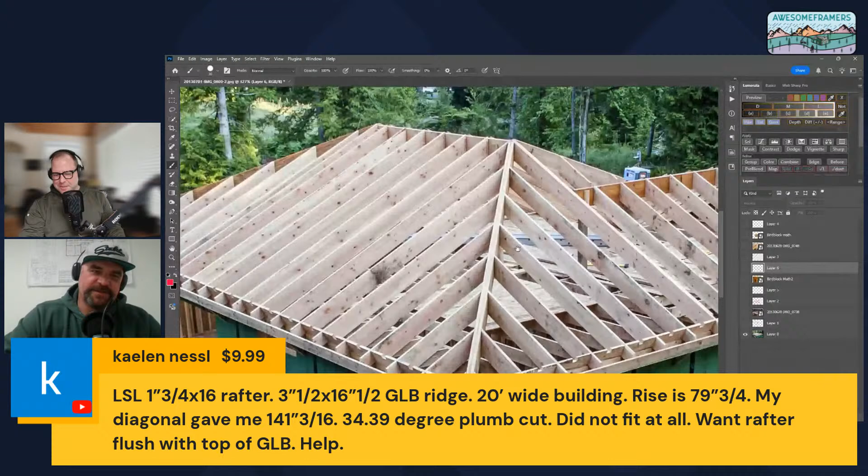Oh, absolutely. In fact, that just happened to me yesterday with the broken hip. It seemed to be very long -- I mean like 1 inch long -- and I knew it wasn't. I checked it, pulled the span. Of course, it's freezing cold, blowing. It's snow, ice everywhere, and I was getting irritated.

So I asked the one carpenter, I said, 'Did you put the plates on that uncommon side?' I said, 'Just snap a line because I don't see a line -- they just nailed the 2x4 down.' He said yeah, he did. So I went over, got down on my knees and sighted it, and I said, 'No, you didn't. That's not straight.'

So once I figured that out, the end of the ridge had to come down enough, so the span was essentially a little small. We were able to get it where it was, which brought the ridge down, and then the broken hip, everything was fine. But yeah, for about 15 minutes I was like, what is going on?

We've checked this. But had we set that upper ridge first -- to speak on what you're saying -- when we did the smaller ridge, that would have shown us that same problem, but we would have known where to look because of the order that we would have stacked it. So yeah, that's definitely true. And I think a lot about that with every roof.

Especially the cut and ship packages, I have to kind of go through that, and I'll send an order of operations the way I would do it, how it's intended to go together, just to help them succeed. Because you could start wherever, but you brought up a really good point.

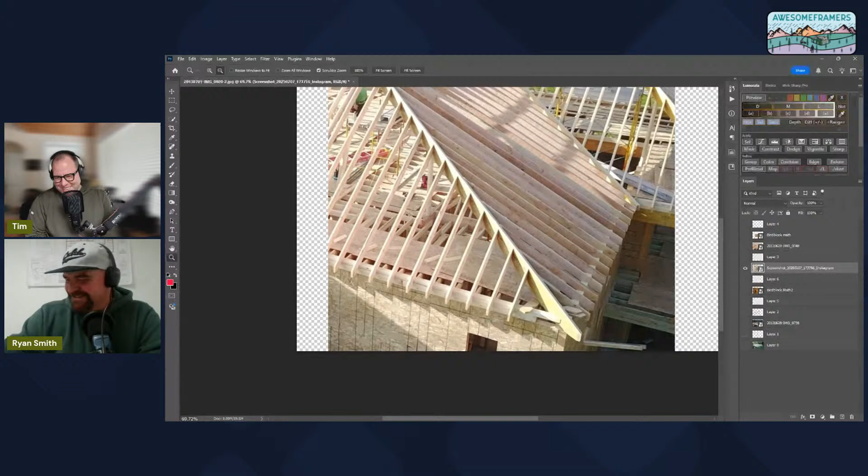Both Kyle and Jordan get really hard on themselves sometimes when they make a mistake, and I'm like, I'm not getting on you, it's part of it. I remember that too at the beginning where I really took it badly when I blew it, and now I'm just so used to blowing it. I've invented mistakes that aren't even possible. So if you want to be good, you have to be willing to make a lot of mistakes.

I told a kid that last year at JLC, and he's a great little roof cutter. He was showing me all these pictures and he's like, 'What's the secret?' I'm like, 'You got to make all the mistakes I did if you want to do what I'm doing.' And he was like, 'That's so profound.' I'm like, 'Well, it's true. I've been doing this 25 years, you're still wet behind the ears. Don't worry, you'll be amazing someday, you just have a lot of mistakes to do.'

I saw this Instagram video, a reel of some guys pitching. These were young guys, probably late teens, throwing about 99, 100 miles an hour. And every time they would throw, the coach is like, 'Okay, your aim's good, but you're rotating a little too fast.' So I feel like that's almost the equivalent - they're going to pitch that thing thousands of times to get where they're good at it.

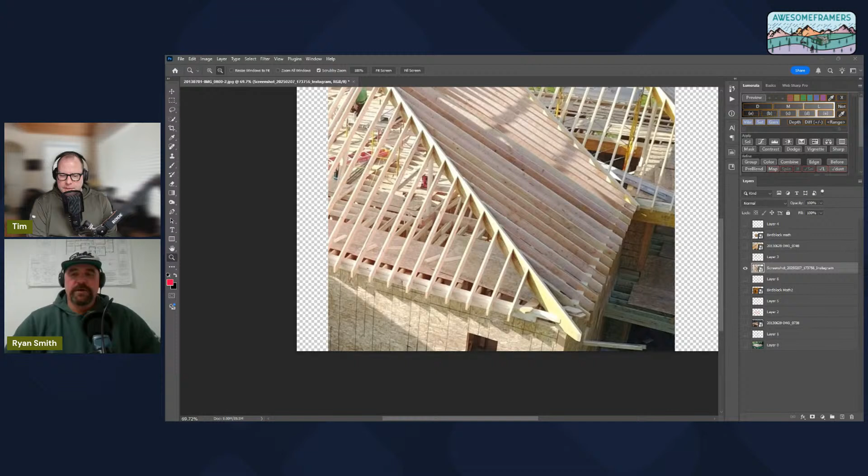Well, it's got to be the same with us too, or a musical instrument. You just got to put the reps in and not be lazy. That's the other problem, we're in a day and age now where these kids can go on YouTube, there's an app for things. You have to put time into certain things to understand them before you're going to be where you want to be. You can't download a how-to-play-guitar app and get a guitar and be good at it. You got to put the time in, and that's true with all the trades, because you're working with your hands and your brain. So there's really no shortcut there.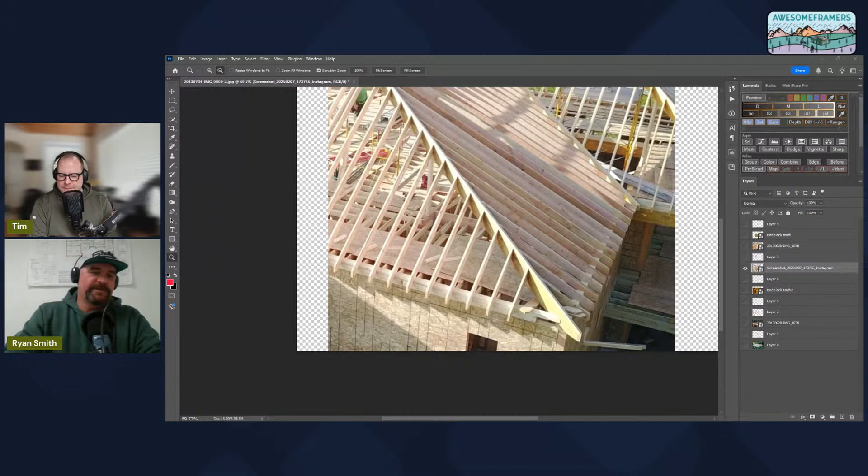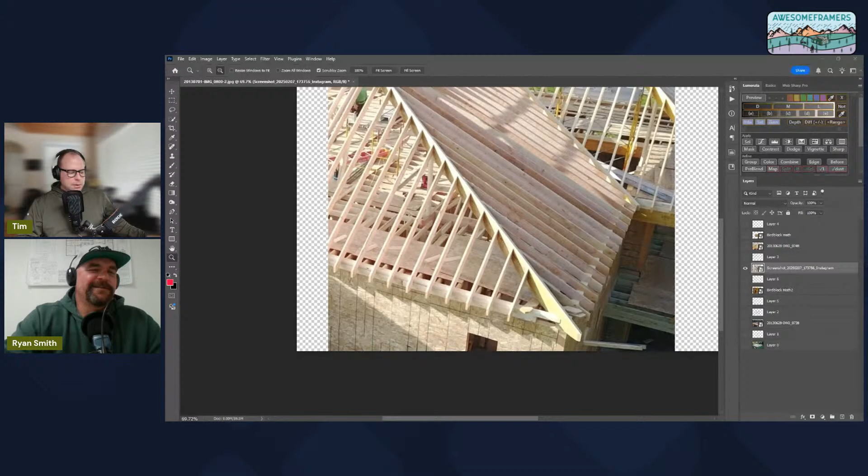And your post the other day too about when the LVL's cupped - yeah, so now you got to make adjustments. We had one house, I remember Jason working with me at the time, this was around 2002, I drive by the house all the time. We had an 18-inch LVL ridge. I don't ever order single-ply 18-inch because it's going to cup - we have the forklift, so I want beams, I don't want to set individual pieces. Sure enough, we had a huge cup, and on that side all the common rafters, Jason had to eyeball a curve to the plumb cut. It was 12-12, so it was a pretty long cut on a 2x12, and he was so proud of himself because he eyeballed that slight radius, so they were nice and tight at the ridge. But on the other side we had a nice big quarter-inch gap because it was a straight cut, and the ridge was cupped the opposite way. Yeah, it is what it is.

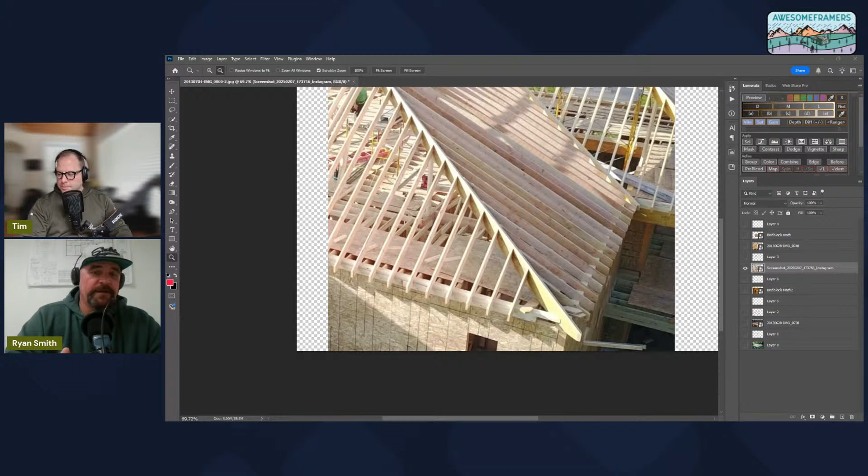I hate that. Especially with LVL, a lot of times if I have a ridge that's cupped pretty bad and I don't have the option of replacing it or getting another one in time, I'll run my saw down the center line where it's cupped worse, and I'll take two passes, maybe half the depth of the ridge thickness, so when we get it out there we actually have the opportunity to kind of drive it flat. It works sometimes, sometimes not - is it worth doing? Probably not. I do it anyways.

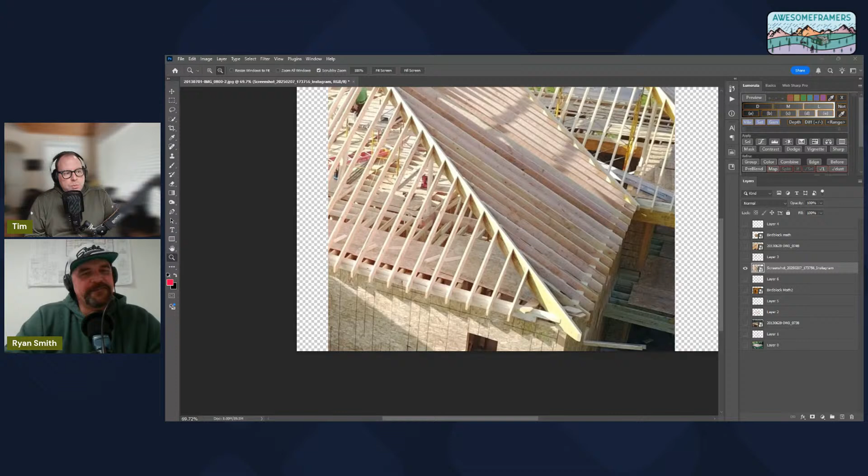So we've had a couple of those where from the cupped side we put one of the big Simpson screws right to the center of the plumb cut on the rafter, and that big washer head on that screw pulled it nice and tight, drew it right in. And then we're so proud of ourselves, like okay, it wasn't pretty, we did our best. And those screws are so fantastic.

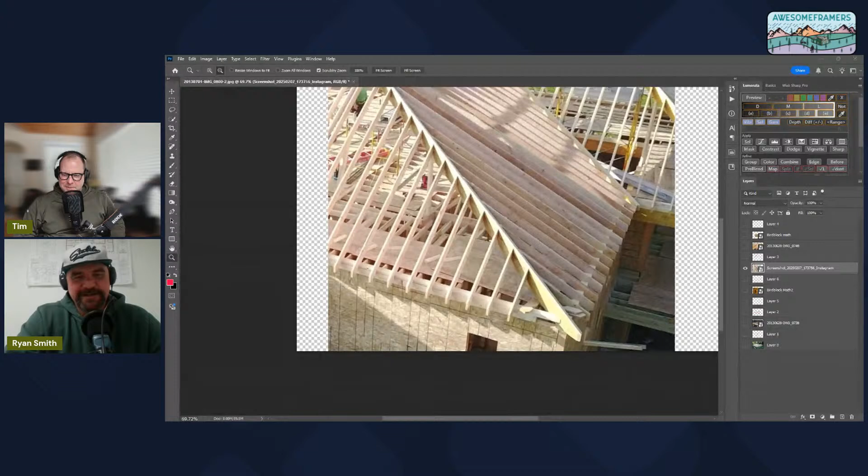That's a good picture there - that's an irregular roof, a whole different ball game. What were the slopes there? I don't remember, 8s and 10s maybe. That looks pretty shallow, maybe a 6 and a 10, or 6 and an 8. We did a lot of 6 and 8s and 8 and 10s on that one, behind me here, the one we just did. The drawings were terrible, they had like 5.5/12s and 6/12s.

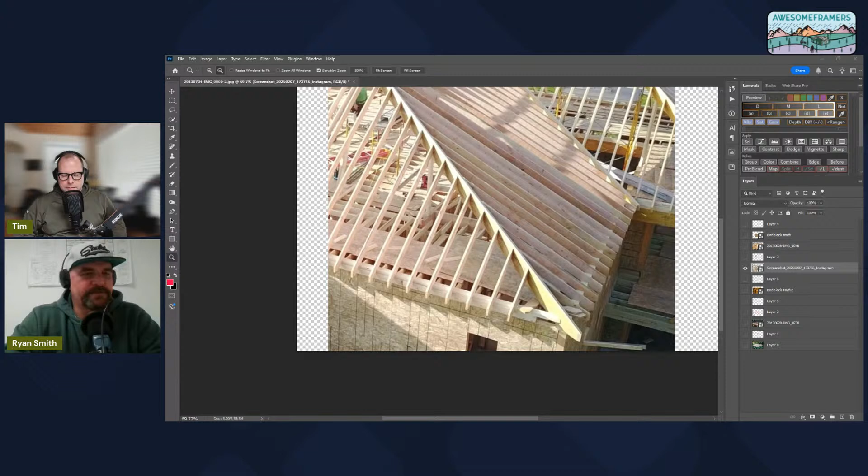I didn't understand it, so I made it all the same, I just made the whole roof uniform. It wasn't worth calling the architect. I don't know - that would be its own topic.

I'm flexible because my dad runs the company, well he's retired now, but I would just know what dad wanted to do. I always lowered the 6 and 8s to 5s and 7s because then the roofers didn't upcharge for an 8/12. No one can tell from the street if it's 5 and 7 or 6 and 8, just the framer would know. So my brother, even now, when he texts me he's like 'Hey, Angela's working on the roofing bid, what are actually the pitches?' He knows I'm going to simplify it.

Off the back of the house, what do I need a 10/12 landing into a 5/12 for? Just make them both 5/12s - nobody sees it.

What's the most helpful thing you want your apprentices to do? I would say pay attention, listen, and ask meaningful questions. Don't ask me the same question two days in a row, because that tells me that when I talk, you don't want to hear me. Or if you honestly just forgot, that's fine, I'll give you three tries. But if you ask me the same thing over and over and you're not improving, that can be frustrating. Be on time, ask good questions, try hard.

That seems to be like a dying thing these days. I'd agree, I worked so hard as an 18-year-old compared to the 18-year-olds now. I don't want to sound like the old guy, but it's just a different world.

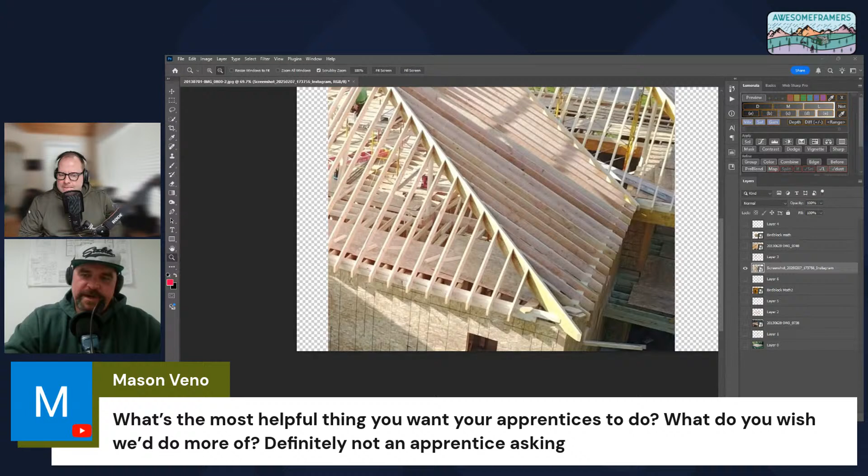Did you start right out of high school? Where I grew up, in a little town, my neighbor was a good friend, his father was a framing contractor. So we were working for him when we were in middle school, in the summers picking up scrap, and it just kind of went hand in hand. Then I did the college thing, and on breaks I would go back and work, and kind of stuck - and here you are.

Joe is so old, he remembers, because I still have some cassette tapes. Oh my gosh, I remember mowing the lawns in high school to Pearl Jam's first album, and I only listened to the A side because that's how long it took to mow the lawns. I had every song memorized.

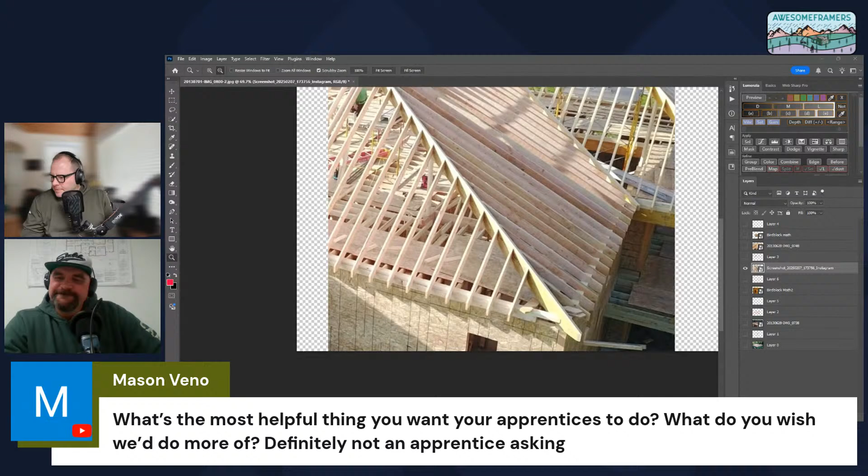I love that question from Mason. That's not an easy one to answer in a few minutes because I actually have to get myself in gear here relatively soon.

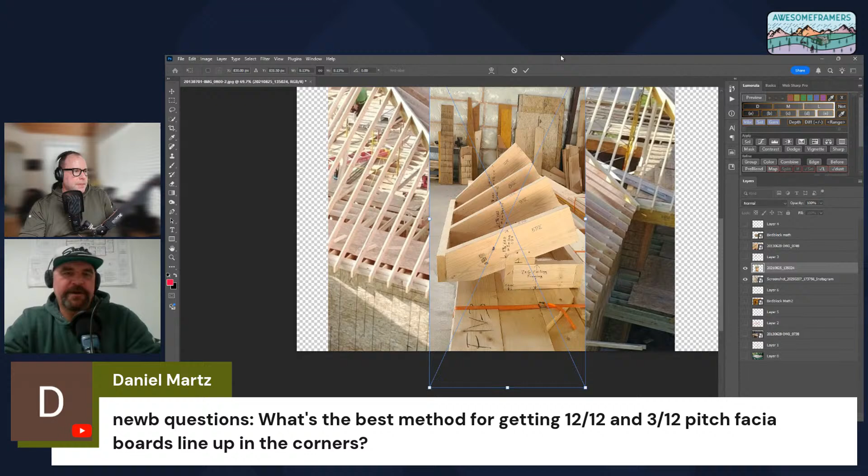The question itself is what's the best method? Show that picture, that's in the drive - the one of how I have the different tails. He's asking about lining - there you go, right there. That's the best way that I know of.

This isn't a model, but you could draw this on a sheet of plywood or a piece of paper. You could do it mathematically too, but we're all visual learners and builders, so I like to draw it out. That's an easy way to do it, and you don't even need a calculator.

You just need a plumb line and a level line. Pull your projection, your overhang over, mark where your plate line is, draw in your fascia, and pick where you want to plane to. In my case, I like the center of fascia, but if it's the outside, you hold your square on 12 there and make a mark at whatever your pitch is, say 3 and 12, and then just connect those dots, draw in the profile of the rafter.

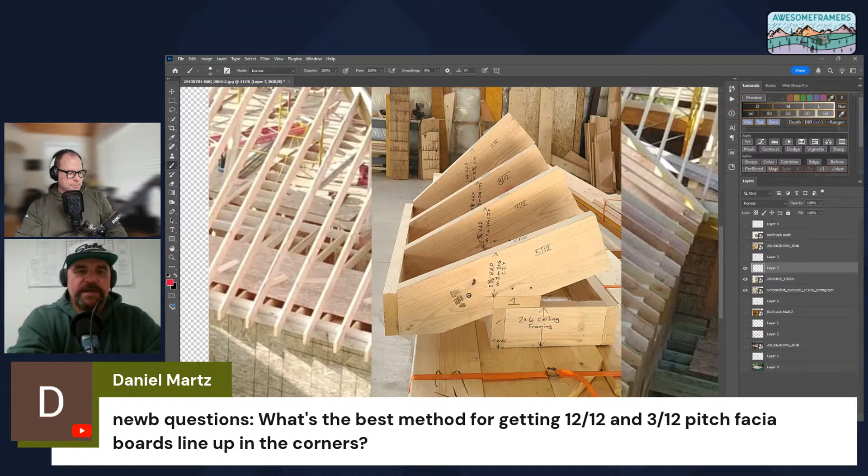Say that again, I'll try to draw it as you do it. We'd start with the overhang projection, just a level line, basically right at the bottom of the soffit, straight in. And then I would draw the fascia in. So, center line? Yep, that's fine. And then a plumb line right at the plate line, and I would run that wild, way up.

And then at the top of the fascia, which is where the top of the rafter planes, if you could draw a framing square in here, Tim, just draw one long. There you go, there's a framing square. You could just hold your 12 on your square at that plane point at the fascia, and then on the blade side of the square, you would just mark whatever your pitch is - 6-12, 7-12. In his case, I think he said a 3-12 and a 12-12.

So another important thing to note, you're always going to plate up the steeper pitch. Always, always, always. That's because, for something similar back here, let's just say this was the same line wild - the steeper pitch just comes shooting way out there. And so this distance naturally has to have more room underneath it. Yeah, it takes off a lot quicker.

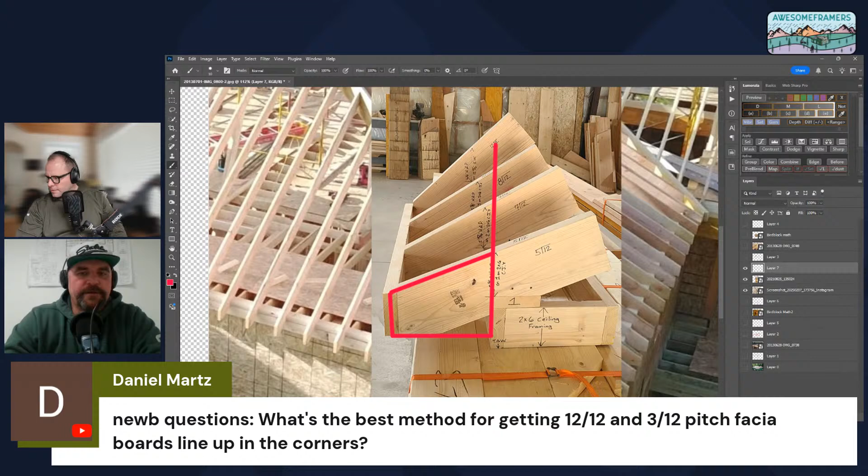I've covered that. If you go through my Instagram, if you go looking back, you'll see I've kind of gotten into detail about that.

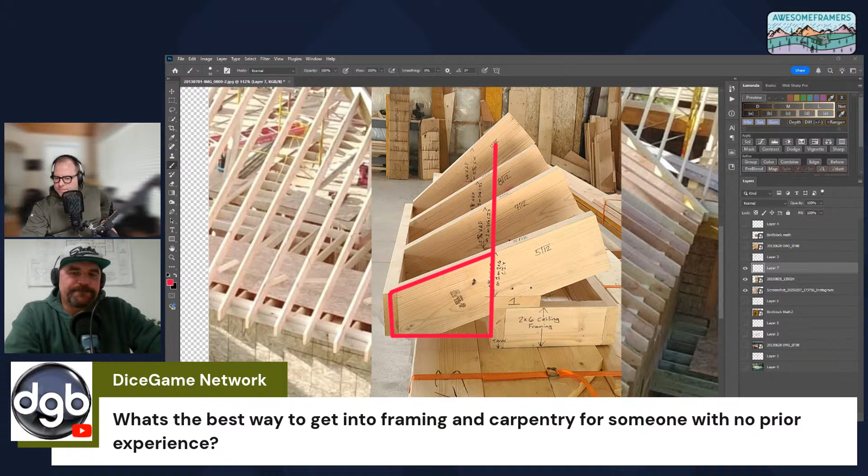160 inches of snow. Good Lord.

Well, let's see here, I'm going to stop sharing. Well, yeah, I knew we'd go long, but you wanted to keep it an hour because you got to bring home dinner to the family. I got to go pick up dinner in 3 minutes, but it's only maybe a 5-10 minute ride from the shop, so we're fine.

Do you have a preference as to who wins in the Super Bowl tomorrow? My team's not in the Super Bowl. I don't want to talk about it, it doesn't matter. I haven't watched, I don't want to see it. I definitely don't want to see the Chiefs win, I'll say that. I don't follow football at all. Tomorrow I'm thinking I might turn it on, but I guarantee you I won't, I'll probably just be reading. Sunday nights to me are sacred - I won't do anything social, won't go anywhere. Sunday night is to relax and get ready for the week. I am exactly the same, I'm a homebody when it comes to that, for sure. Kind of get psyched up for the week.

Well, so I'll work on a couple drawings, Ryan, and then we'll just - yeah, we got a couple weeks yet before we. I think if we can get the slides, then that will force us to stay on the topic of whatever's on the slide.